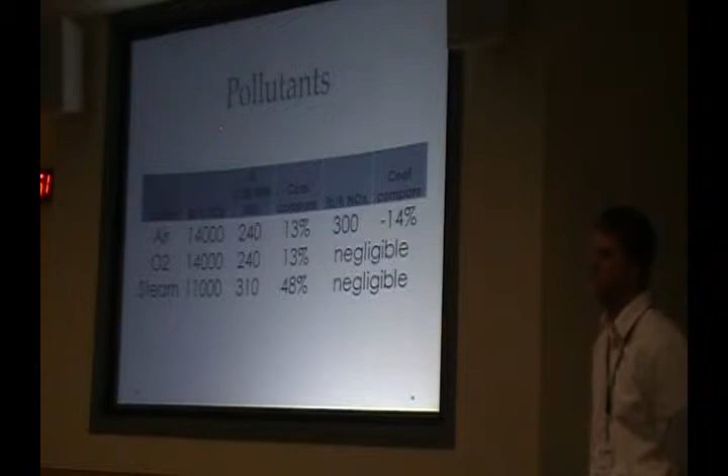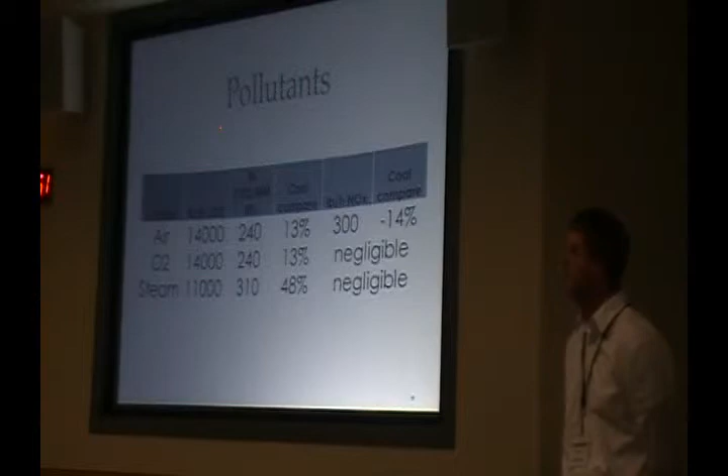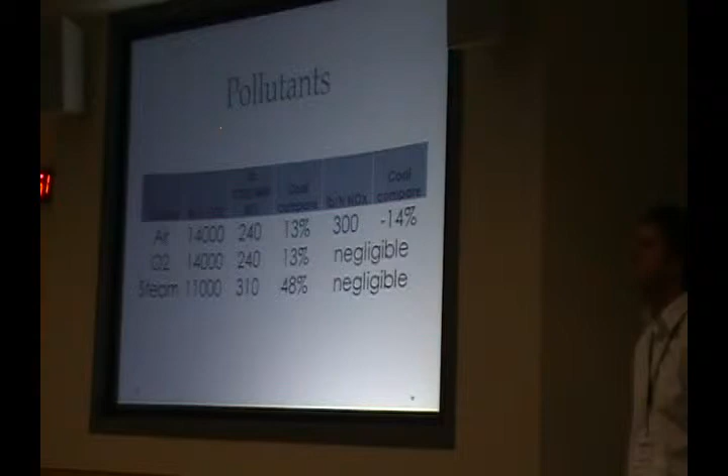Okay, so I'm really interested in your third design here on the steam gasifier. I've never even heard of that or seen that or anything. So I'm really interested in that option, since the NOx is so low, because that's going to be the limiting factor in LA County on emissions is NOx emissions. So can you explain a little more detail about how it works? I know you had a graphic, if you want to go back to that.

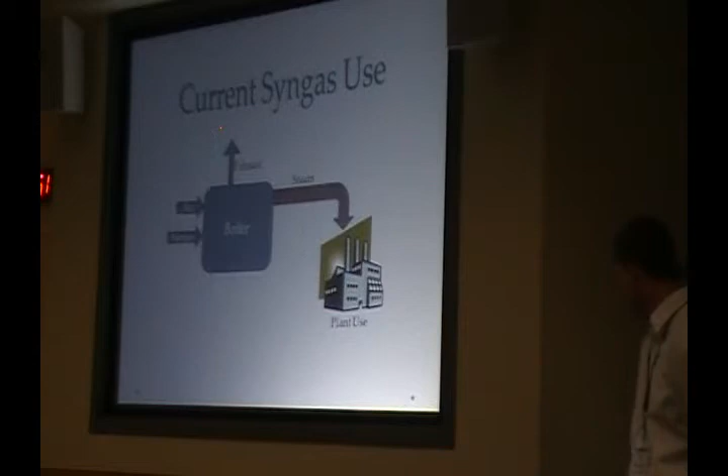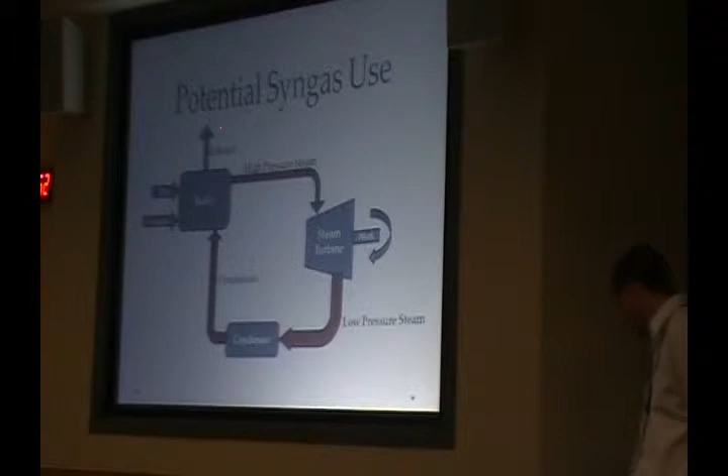Are you talking about the gasification and cyclone separator portion, or are you talking about the turbine? Well, these are where the water shift - yeah, inside the gasifier, you had another graphic up there. Go back further, maybe I'm misunderstanding what you're talking about. The steam gasifier, right there. Tell me how that works. What part does the steam play?

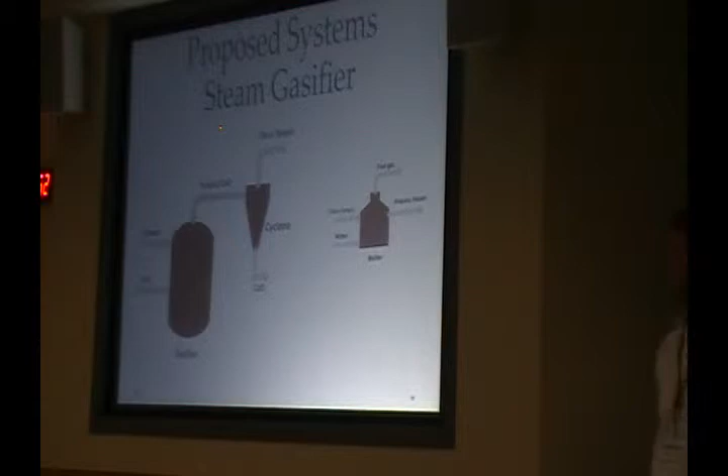There's no air going in, is that right? Chemically, what happens in there? Instead of oxygen or the air, the steam goes to the gasifier with the post-consumer carpet. Okay, so instead of having air going in, it's steam.

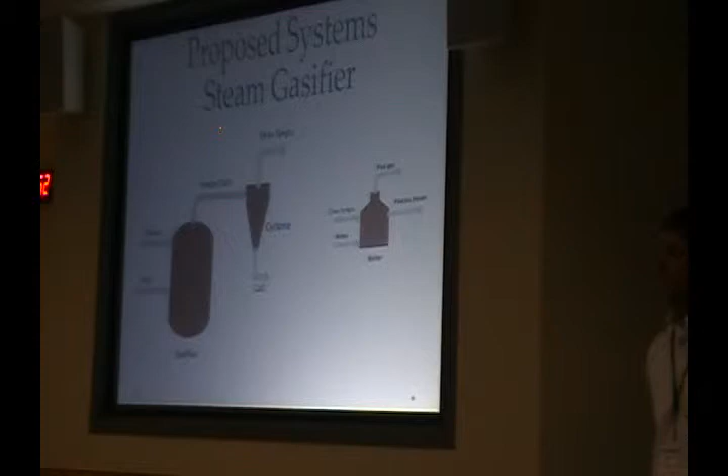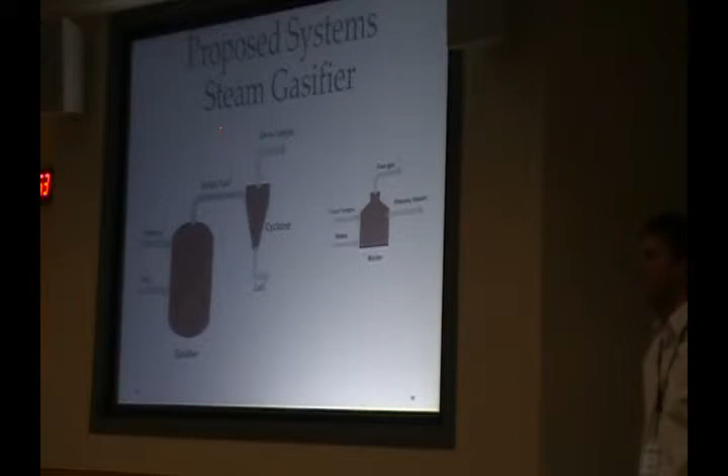So you've got H2O, right? Mm-hmm. Okay, I'm not a chem E, okay? I'm a double E, so be gentle with me. So you got H2O going in there with the syngas, right? And somehow the H2O breaks apart, and the oxygen - explain that to me, that's what I don't understand. You mean the reaction? Yeah.

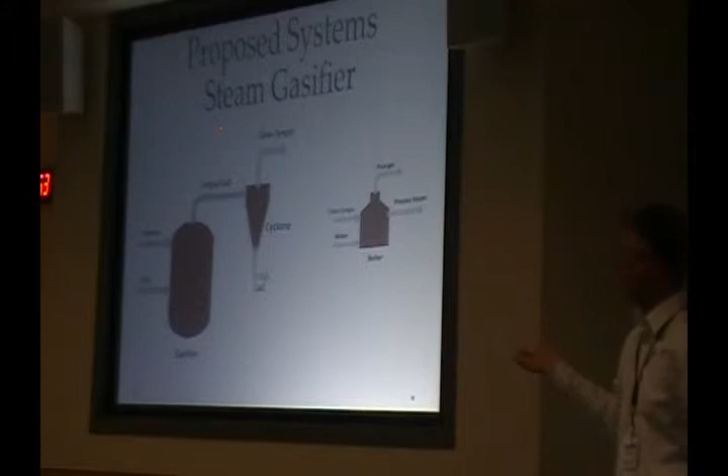There are actually several reactions that take place with the gasification using steam. There's a reaction to produce methane, and then one to produce the actual CO and hydrogen, for each of the different components. Okay, so whereas in the oxygen gasifier, you just have O2. Well, here you do have oxygen and some hydrogen, but the oxygen is the key as far as producing the syngas from the reactions.

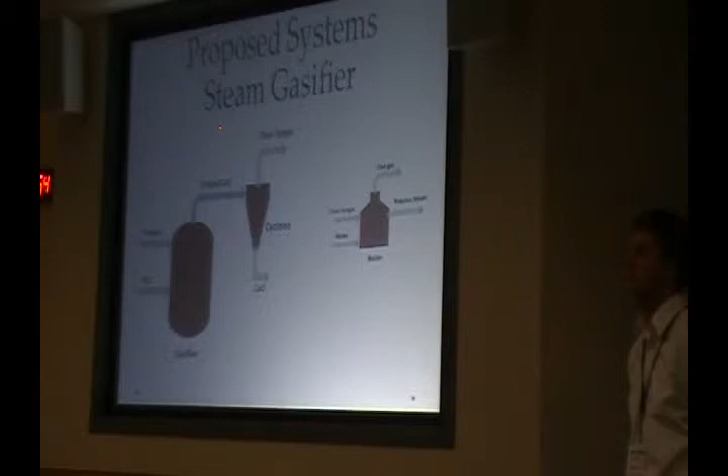We didn't go into detail about the reactions, maybe we should have. Maybe that's something we need to. But it's kind of, at a real high level, it's something I'd kind of like to see. Right, it will be in greater detail in our report. Yeah, okay, because like I say, if it's that low in NOx output, it might be worth considering. The other thing you gotta know is how much steam and all that - does it make sense? If I have to put in 3 times more steam than I'm gonna get out, it's probably not gonna work.

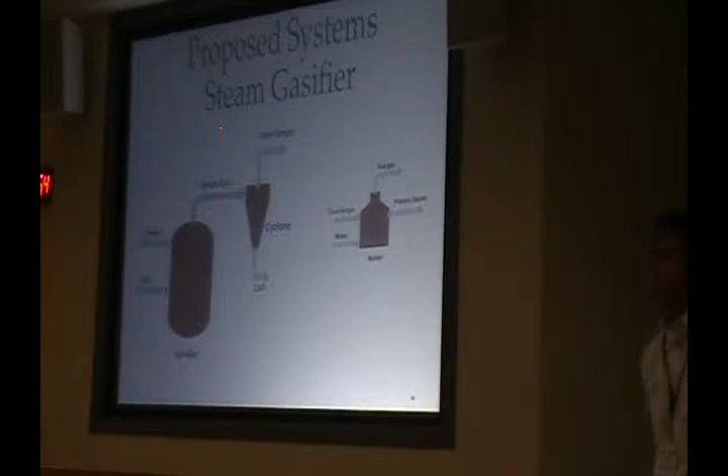We designed the steam gasifier with the intent to actually produce electricity, which is one of the requirements, I believe, in California. It was to produce 5,000 kilowatts. That's good, so a lot of the steam would be used to produce electricity in a steam turbine.

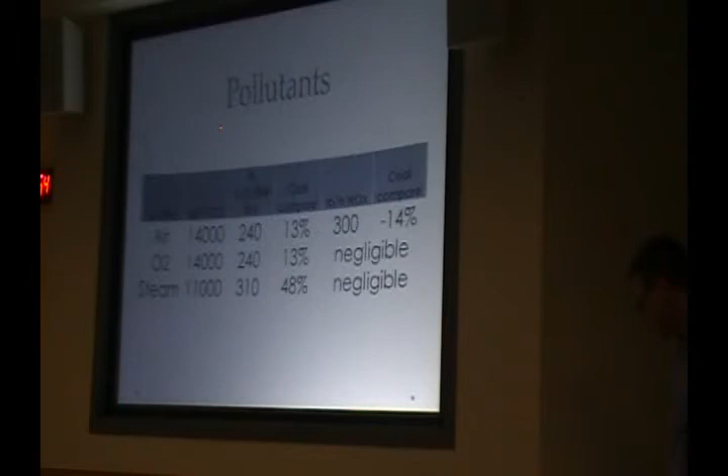I don't know, the energy balance on the steam gasifier, when you're seeing BTU per pound of post-consumer carpet waste, is it that low because of the energy used to make the steam going into the gasifier in the first place? Yes, to heat the steam up, starting from water, so that was subtracted from the initial value, otherwise they're fairly close, and then you have to subtract that initial heating value.

So if you had some kind of solar boiler or something that could get your steam, you might get a plus off of that. Especially if you're in some place where it never rained, like LA County. It's definitely something to consider.

Where does the heat come from to run your steam methane case? I don't see any source of heat, everything there absorbs heat. And also on making the methane, that sounds like a reaction we'd all love to see, but I wonder if it can actually be carried out in practice. Is this based on equilibrium or kinetic considerations? Based on equilibrium, you might only get a tiny fraction of what you'd get assuming everything goes the way you'd like it to go.

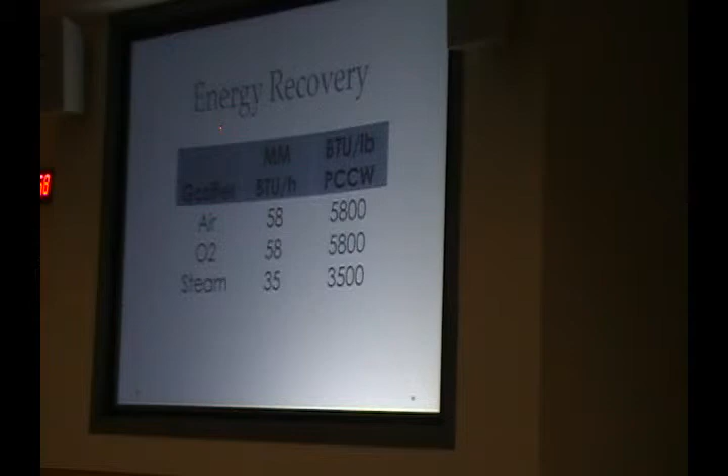Tell me a little bit about your exhaust coming off of your process diagrams. You've got a few that are showing exhaust streams. What's in your exhaust? The products of combustion, yeah, CO2 mainly.

Do you have a sense of the proportion of CO2? Is it pretty high CO2 and nothing else, or are there other components? Do you know the proportions? CO2 and water, I don't know the proportions off the top of my head though. CO2 and water would be implying complete combustion, which would be after the gas turbine, assuming complete combustion.

Now, you guys had a spot where you're doing some analysis on the gasification process, and you had the calcium oxide as part of your ash stream. Did your BTU values compensate for the breakdown of limestone? Yes. Did it?

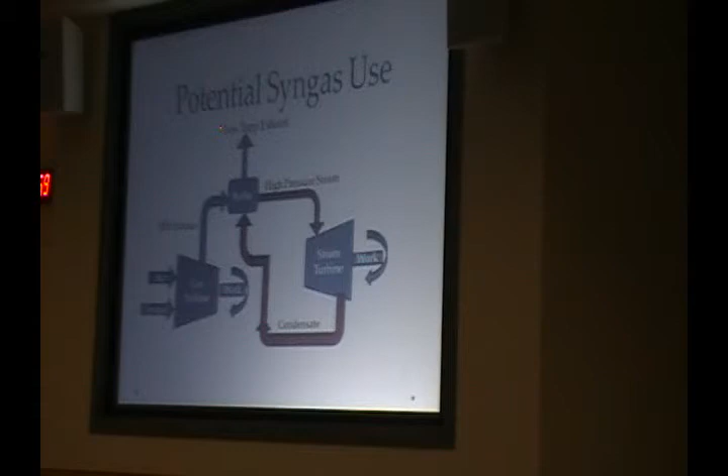One thing you might consider for your conversions there, what your BTUs that you're generating, you might put that in terms of how much that could offset energy for a plant. If you're going to put that energy back into a plant, it might help others to see just how much is the offset of the energy consumption for the plant. Is it 2%, is it 20%? That's going to vary, of course, by the type of plant and how much its energy consumption is, but if you gave some examples, that might be helpful. It just gives a person some perspective.

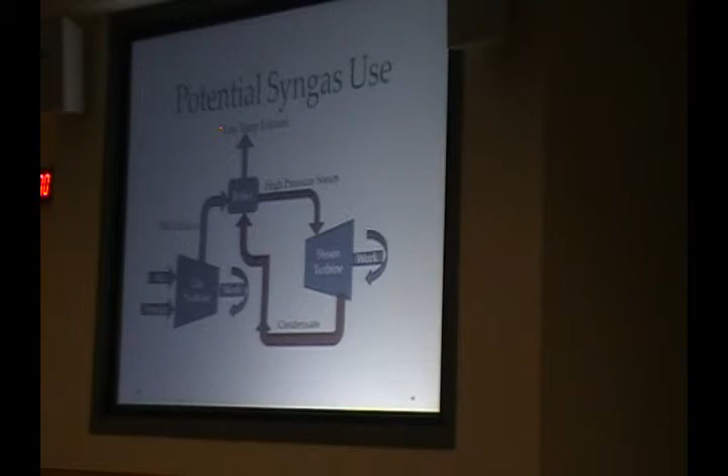It's actually going to be one of the main focuses for the economic analysis, which will be in the final report. So we knew that if we're able to put energy back into the plant, then there's a definite cost savings or energy savings versus having to purchase it offsite.

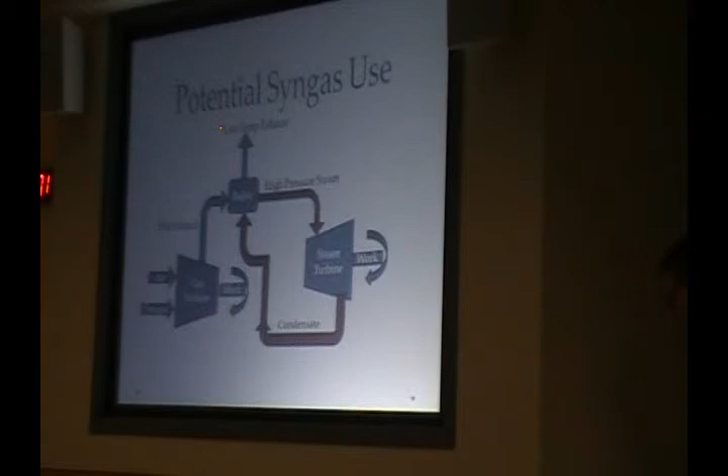Go back to one of the emissions charts, just a suggestion. Yeah, that... well, maybe you did.

You're saying that your pollutant load is going to be 113% of the equivalent amount of coal? Actually, I believe I got those signs wrong, so it'd actually be 13% less emissions, and the other would be 14% higher. I got my signs wrong. That makes more sense. Yeah, because that's not what we see in reality.

So the steam is 48% less? Yes.

I'd like to see you put in a real number instead of the negligibles, because if I go to the guys in Southern California, they don't buy that, so they won't accept a number. Well, when you said negligible, did you mean compared to an EPA regulation or something? Compared to the air, compared to the emissions with the air gasifier, so it was so minuscule it wouldn't come into play for our comparisons. A number would still give someone some perspective. People care about those things, sometimes it's even required for permits, so you have to tell them something.

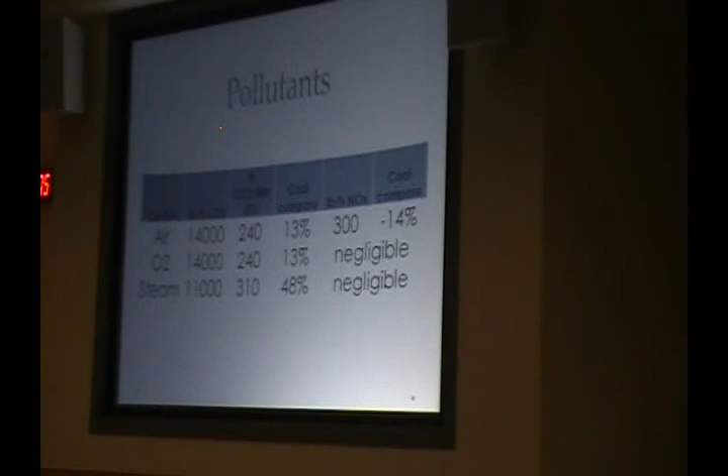As you're presenting, it might also be good to show more of your equations—your equilibrium equations, your conversion equations—and then as you're going through your presentation and talking about those things, explain that these are theoretical and don't occur exactly in reality, that the proportions are different in practice. Just getting that out there is helpful for an audience to understand this isn't the perfect world, and we know the world's not perfect, so it doesn't happen exactly like this, but this is the way the chemistry works generally, so that's sometimes helpful for an audience.

What temperature does each of the gasifiers run at in the gasification chamber vessel? Off the top of my head, we should have put it in here, but from what I remember it's something around 1700 for the air and O2, and I feel like it's lower for the steam. I don't know the specific numbers off the top of my head.

Something I'd like to see is what temperature it operates at. And that would be good to put on your process diagrams—you could add that into your graphics there pretty easily. That would be a good piece of information.

I think it would have helped me if you had a process flow diagram of your boiler and gasifier showing the loop—maybe natural gas into the boiler, BTUs in, BTUs out, and a recycle loop of BTUs based off that SynGas that comes back to your boiler. Just almost an energy balance right there, but in drawing form. It would help explain to everyone a little bit.